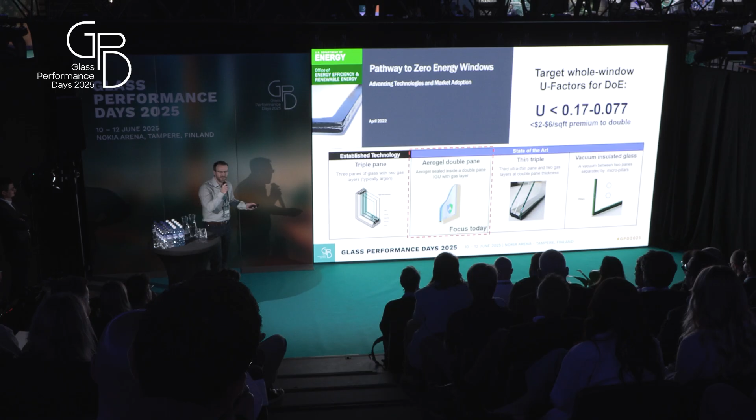So let's maybe start with, what is an aerogel? Aerogels are a class of material that are typically 97% air. So they're formed of a nanostructure that traps air inside of their pore network, and it creates the very interesting set of properties. Aerogels were originally developed by NASA to insulate spacecraft because they are some of the most thermally insulating materials ever created. They are super light, and they're fire resistant. But they've always been blue.

The science of why aerogels are so insulating is because they really target 2 of the main modes of heat transfer that we see through any material, but windows in particular, conduction and convection. And so the aerogel material, because it has this nanostructure, because it's 97% air, there's very little solid material for something to conduct through. But because it has this complex pore network, it's essentially trapping air or argon or krypton or whatever you've put inside that IGU inside that pore network, and it prevents any sort of convection inside that IGU as well. So you have this dual benefit of having very low conduction, very low convection.

But the aerogel is transparent to most radiative forms of heat transfer. And so what that enables is that you are not changing your solar heat gain coefficient or your visible transmission. You can apply whatever low-E coating is most suitable to your geography, to your climate zone, but you are dramatically reducing your U-value. So you're getting U-value benefits without changing your solar heat gain coefficient or your visible transmission, and because of the lightweight nature of the aerogel, you're not changing your weight or your thickness of your IGU either. So really think of this as a coating that is focused on improving the U-value without affecting anything else.

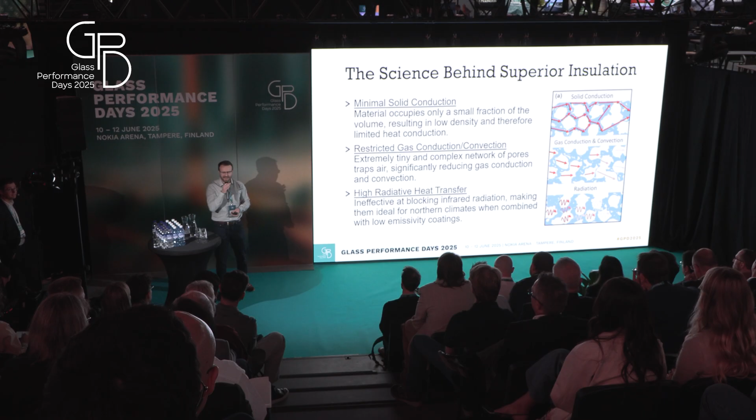One of the other important aspects of the aerogel when it comes to sustainability is the lower embodied carbon that an aerogel material has. Because it is 97% void space, there's very little physical material that goes into making this coating. And so when you compare it to an alternative technology to get high performance, something like a triple pane, adding another pane of glass, as we all know, is a material that has very high embodied carbon. So if we can replace that additional pane of glass with an aerogel coating that has very low embodied carbon, you're ultimately going to have a product that has a much lower carbon footprint than the triple pane alternative.

And then finally, I think we heard this in the presentation about thin glass as well. There's a weight benefit to the aerogel. The aerogel is actually going to be much less heavy or less dense than another pane of glass, even a thin pane of glass. So there's an additional sustainability benefit because of the reduced weight of the resultant unit. So that's going to affect anywhere in your supply chain.

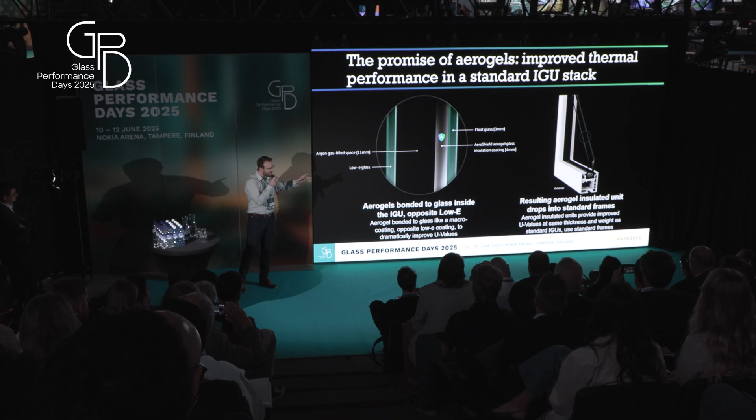So I've talked a little bit about aerogels and the material properties of them. But what does this look like in an application? And I just want to get people's heads wrapped around the concepts or the prototypes that AeroShield is building right now. You actually have an aerogel bonded to glass, almost like a glass coating, typically opposite the low-E. So you'd be either surface 3 or surface 4, depending on where the low-E is. And then you could still have this space, right? So you'd still have argon or krypton or whatever gas fill that you want in the middle.

And really the benefit of doing it this way is that you can create a window or a unit that has better than triple pane performance inside the exact same double pane glazing pocket. And you're using the exact same type of glass. You can use the exact same spacers. You can use the exact same sealants that you would use in your standard window manufacturing process. And you're going to get a higher performance unit.

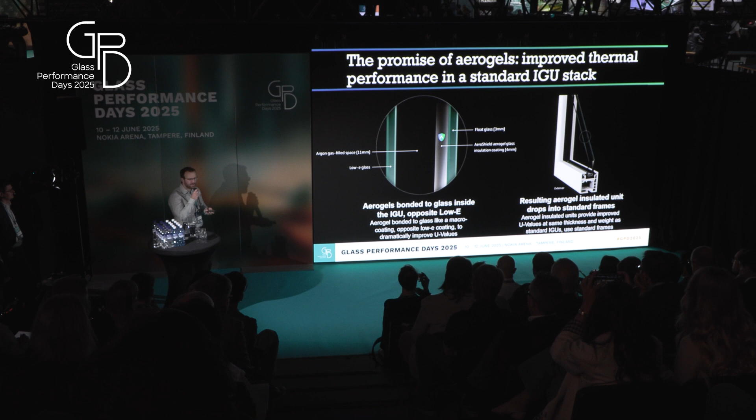So hopefully this is something that seems very exciting. You have a coating for glass that can improve the performance of the window to the point where it's better than a triple pane. So why haven't we seen rapid adoption of this technology in the window industry? So I want to start by walking through a little bit about the history of aerogels, what they have looked like in the past, and then where we're going today.

Historically, the main challenge with aerogels is that as they were developed by NASA, they were never really starting with this starting point of transparency. That was not the goal. It was super insulation. And so subsequent research into aerogels has always struggled with this starting point of a fairly high haze value, very low visible transmission. You can see over time that you're looking at Tvis less than 80% for historic efforts at making aerogels for windows. And so this has resulted in products. There's skylight and daylighting options that use aerogels to create a translucent effect with super high performance, but it's really never been used in vision glass because of some of these issues.

One of the other issues that comes with aerogel processing is it's hard to make big sheets of aerogel. So aerogels have a very specific manufacturing process, and historic issues have been how can you make sheets large enough for a vision glass, which has resulted in people cutting them into different shapes and sizes and putting them inside of an IG, which creates really interesting patterns and great prototypes, and you can test the thermal conductivity, but this is really not the mass market product that you would hope to see out in the world.

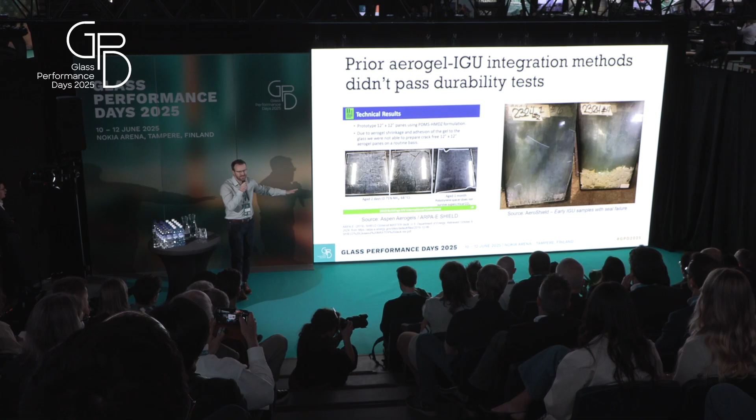And finally, the last challenge that aerogels have historically had is in passing all the durability testing that you would need to see in the world of windows, ASTM 2189, 2190, the thermal cycling challenges that the window industry faces. And so some historic examples, there was an ARPA-E program in the late 2010s focused on how could you make aerogels on glass. And one of the challenges was as the aerogels were processed, they would shrink and they would crack on the glass. And that really resulted in, again, windows that would not be used.

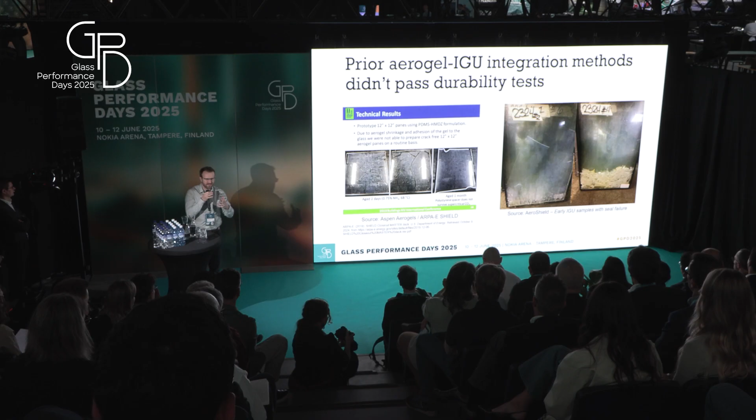On the right-hand side, you see some early AeroShield units where we had a seal failure in our IG, and the aerogel being exposed to high moisture content essentially breaks down, and you get optical defects and mechanical failures that are insurmountable.

But there is hope, and there have been a lot of recent advances in aerogel science and manufacturing that have brought them incredibly close to commercialization. And so I want to walk everyone through some of the reasons why we are seeing major advances in aerogels for windows right now. And the starting point was clarity, achieving the world's most transparent aerogels. And I know we have a lot of optics nerds here, so I'm going to go through a little bit of the science. Aerogels are a pore network. And this light can interact with this pore and essentially deflect.

And that was kind of the fundamental challenge with haze, is that the light would interact with this pore network, deflect, and you would get this kind of hazy nature because the light was refracting through the aerogel pore structure. And what Dr. Elise Strobach, our CEO, found during her PhD research is that you can actually model the interaction of light with these aerogels through Rayleigh light scattering.

The same reason that the sky is blue is the reason that aerogels were blue, is the light diffracts, and the fundamental equations basically stated that the particle size and the pore size inside that aerogel network are what govern the way that light interacts with it. When we think about something like a typical aerogel that you may have seen, those really blue, hazy ones, the pore size of those aerogels is typically about 80 nanometers. The optimum is somewhere between 6 and 10 nanometers.

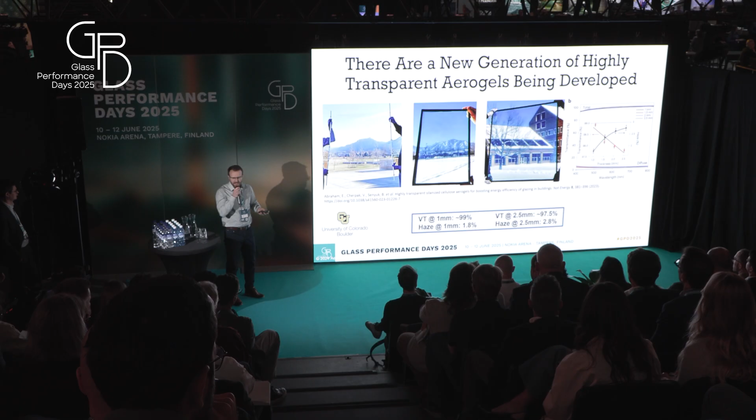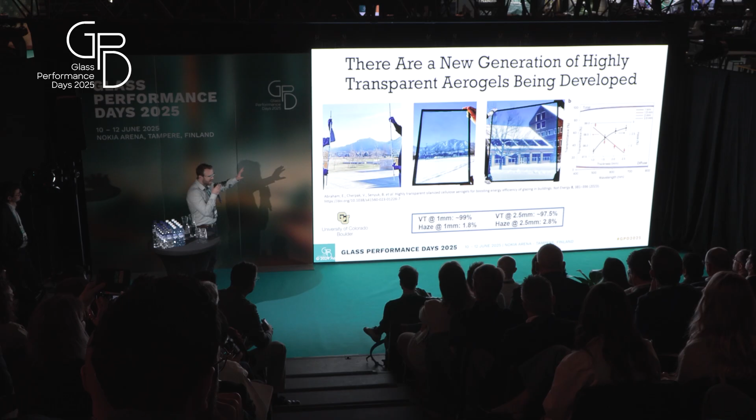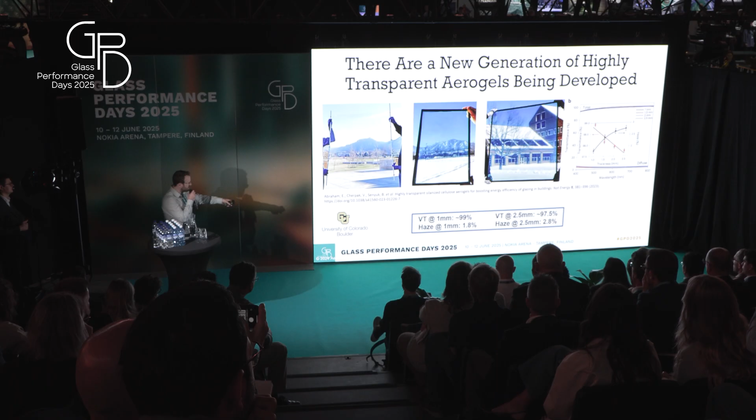And so when we think about what is out in the world today, what work is being done in aerogels, there's a group out of CU Boulder that are working with aerogels derived from natural sources. These are aerogels on about a 1 meter square size, and they have visible light transmission of about 99% at 1 millimeter thickness, and about 97.5 at 2.5 millimeters thickness. Haze values of about 2.8% at 2.5 millimeters thickness. And it's a really exciting result. This was published in Nature, and if you are interested, I highly encourage people to look into the work that they are doing.

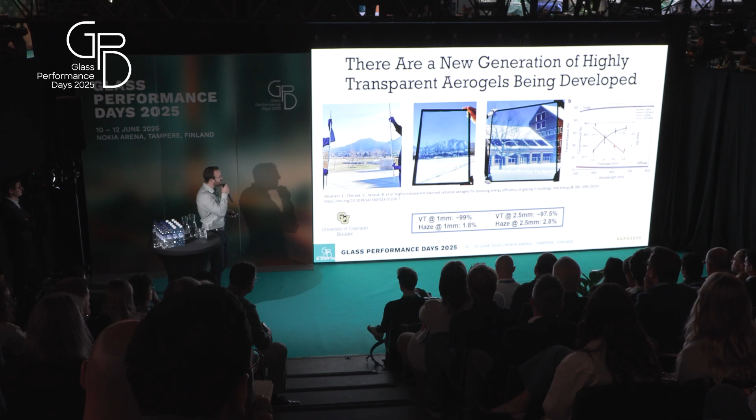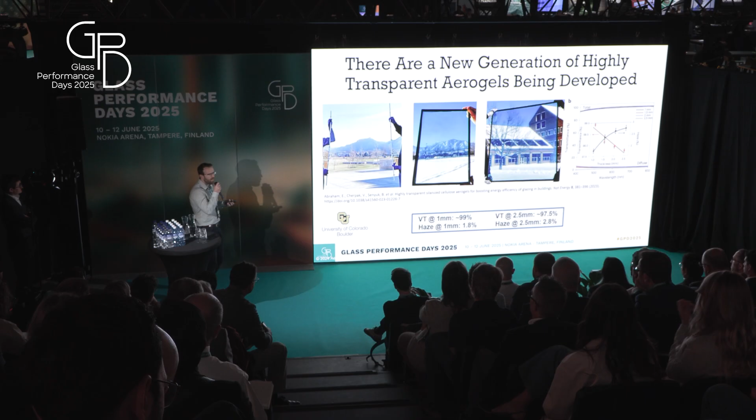But I think one of the important things as you think about, as a window industry and someone who is working in this space, aerogels are insulators focused on conduction convection. And so the thickness of the aerogel is going to change how much insulation you are actually getting. So achieving 99% visible transmission at 1 millimeter is not as valuable as achieving 98% at some higher value of thickness. And this is really where AeroShield is focusing on what is that U value performance that creates a step change in performance that gets the window industry excited.

And so AeroShield, what we do, we are focusing on aerogels at the 4 millimeter thickness and greater. So we achieve 98.4% visible light transmission at 4 millimeters of thickness, and haze of about 1.5% at 4 millimeters.

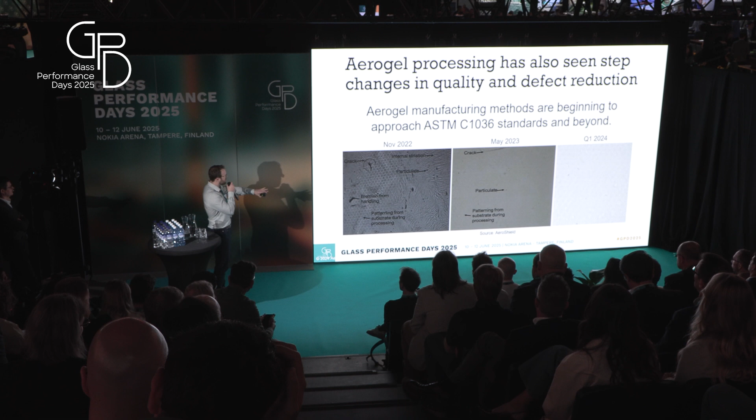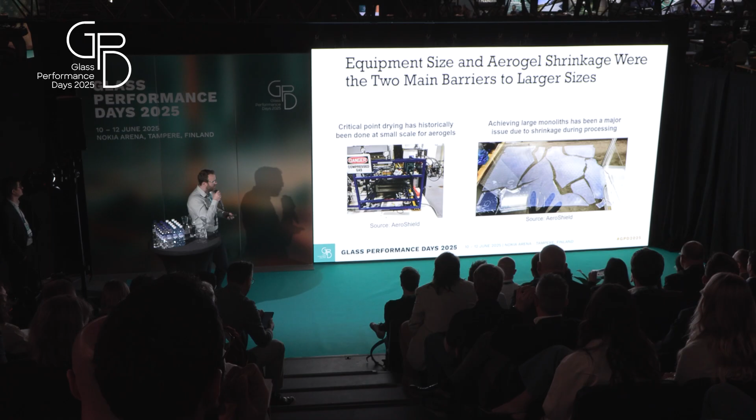And so back in November 2022, when we made aerogels, these are projections from our projection system. You were seeing all sorts of defects because of the way that the aerogels were produced, to the point where today, we're in 2024, we do not have any of those defects inherent in the aerogel. One of the other big things that you have to see is size and scale. You have to be able to make large sheets of this at high quality. And one of the historic challenges of aerogels, as I mentioned, is that in processing, they would tend to crack as they shrank. One of AeroShield's breakthroughs is making aerogels that no longer shrink in processing. So we have a processing step that eliminates the shrinkage.

And finally, when we think about aerogels, they have to pass all the standard industry tests. We think about these in two ways. What are tests that are intrinsic to the aerogel? And then what are tests in terms of how you're integrating the aerogel into an IGU? So intrinsic to the aerogel: UV stability, off-gassing, compatibility. Tests of aerogel and IGU integration would be all your thermal cycling, temperature cycling, slam testing, mechanical testing.

The aerogel itself, especially silica-based aerogels, are very stable. In previous papers that we've published, the aerogel was stable to about 600 Celsius before it started to degrade. And then we've also passed thousands and thousands of hours of UVA, UVB, and we feel very confident in the thermal stability. But some of the recent breakthroughs, and we'll see if this video plays, are in the integration.

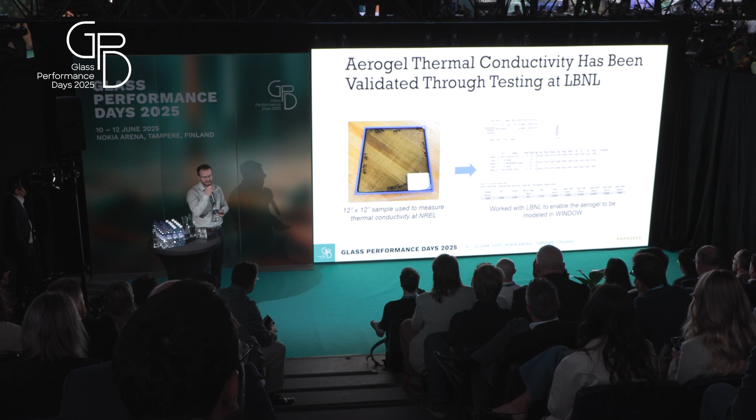So as we think about the opportunities and the future areas that we're working on, we are currently working with Lawrence Berkeley National Labs to integrate the aerogel material into the window simulation software. So we've done a number of tests. This package is available now with the thermal conductivity and all the properties that would enable us to simulate all sorts of different window performances and window configurations.

And for people who are looking to either have limited thickness, reduce weight, reduce the number of low-E coatings that you're putting into your windows, the aerogel can provide this huge performance boost to any sort of glass stack. But we also invite anybody to come up with their ideas. We want to be a tool in the toolkit of your developers and designers to say, what would you do if you had a super insulating transparent material that could be put inside of an IGU?

Finally, some of the things that are interesting and that we ask the glass industry about everywhere we go: how do we certify this? This material is very interesting because it has this open pore network. When we do material testing, typically on a heat flow meter or something like that, you're just doing it in an open space on the material itself. When you put the aerogel inside an IGU, the argon is actually going to infiltrate the pore network. You get better performance of the aerogel itself when there's argon in that pore network. But it's very hard to measure it on a heat flow meter.

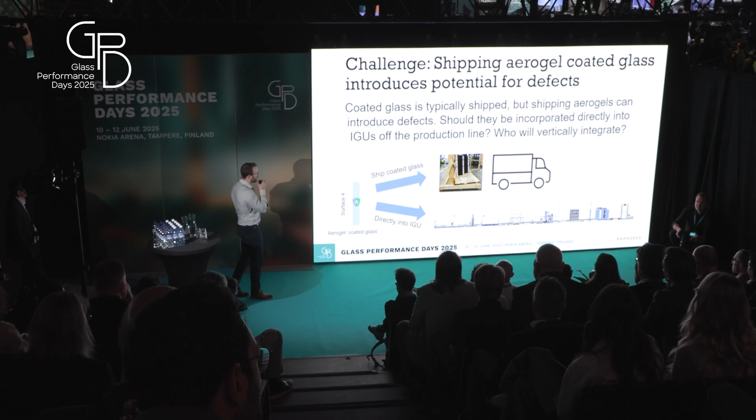I think the other thing is shipping. Shipping aerogels is challenging. Today, we take aerogels off the line, put them into an IGU, and we can ship that IGU. But shipping aerogel itself, or even aerogel-coated glass, is a challenge. So that's something we're thinking about and talking to the glass industry about, what is the best way to do that. And then finally, the optical quality, and developing ways, I know there's plenty of inspection people here, to inspect aerogels in line to enable the high quality that the window industry is looking for.

So with that, I just want to thank everyone. We are really excited to collaborate with the window industry. We know that you guys have years and years of experience of how to turn these types of innovations into products, and we're really excited to work together with you.